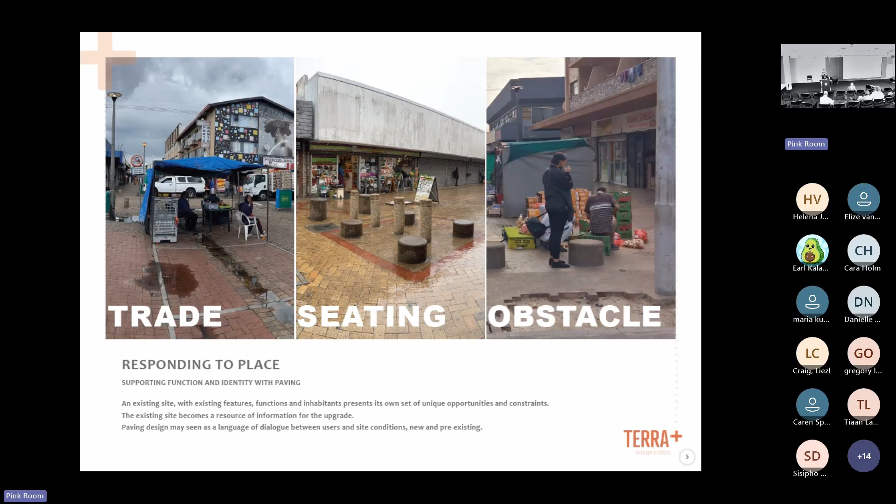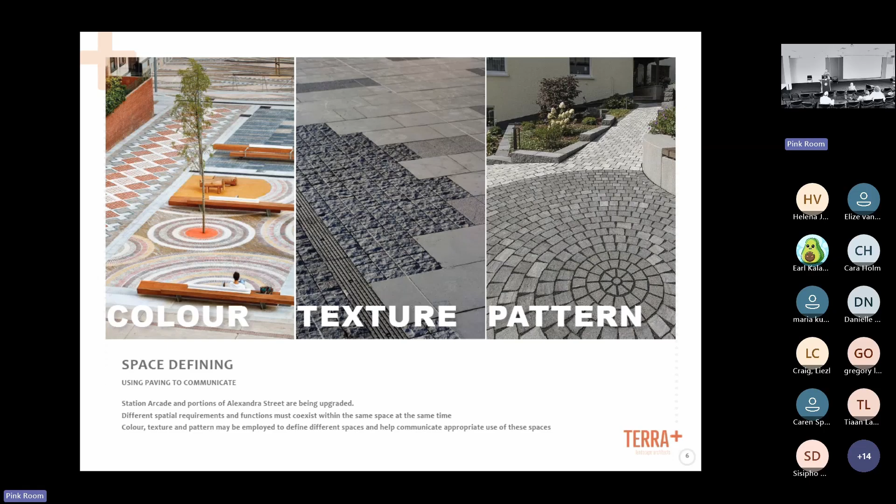We did this by defining the space and creating spaces that could become legible for pedestrians. It really is about creating those textures and colors and patterns to define certain public spaces.

There were significant intersections, and each had a specific way of dealing with the paving and with the seating. You can see some trees there - unfortunately those have fallen by the wayside because we couldn't get a water connection or irrigation to the trees. So that is one of the constraints that happens.

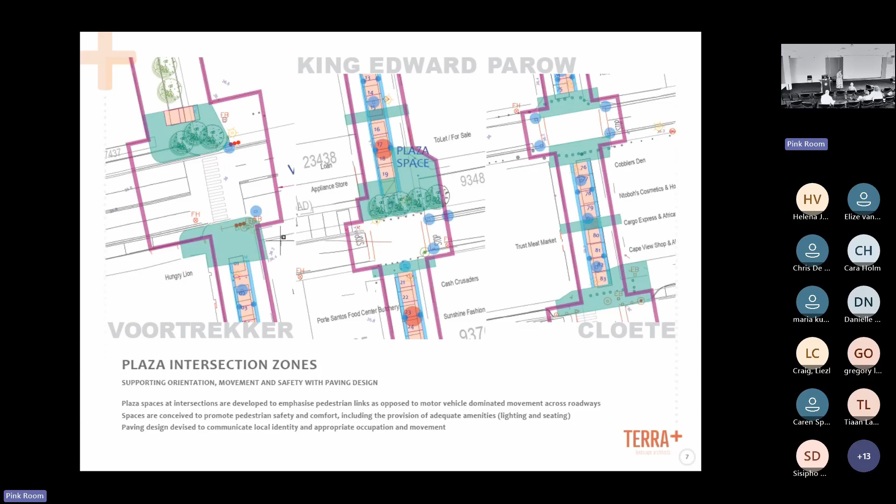You'll see that there are trader bays that we had to accommodate in the space, bollards that we had to accommodate, and paving that happens along, and lighting that needed to be accommodated. So the plan actually became quite diagrammatic, and the execution of it then had to start happening in the paving itself.

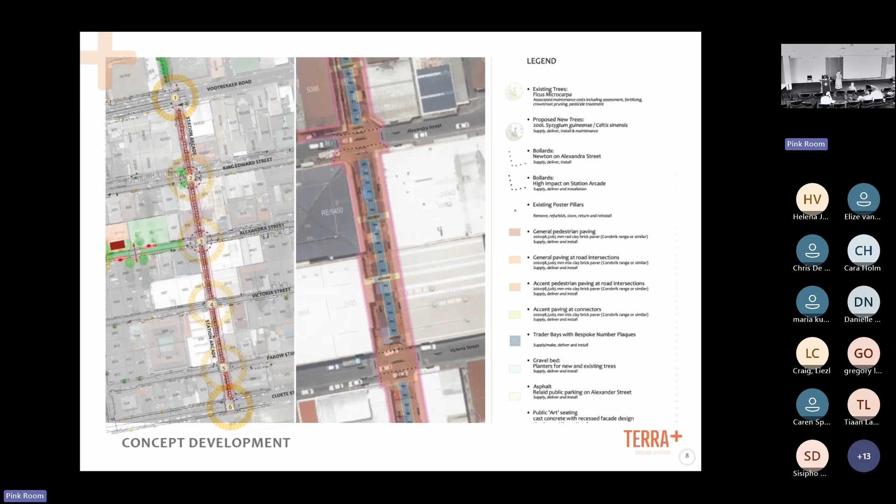This is just one of the plans, to show you what these type of plans start looking like - the concept development, and then the paving patterns we designed to create the identity of each of these spaces, which is quite exciting to do.

What is nice about this, and great about this, is that it shouldn't cost anything more to create something interesting, because a paver is a paver - it costs the same whether you lay it in one straight plain paving or whether you start creating patterns with it.

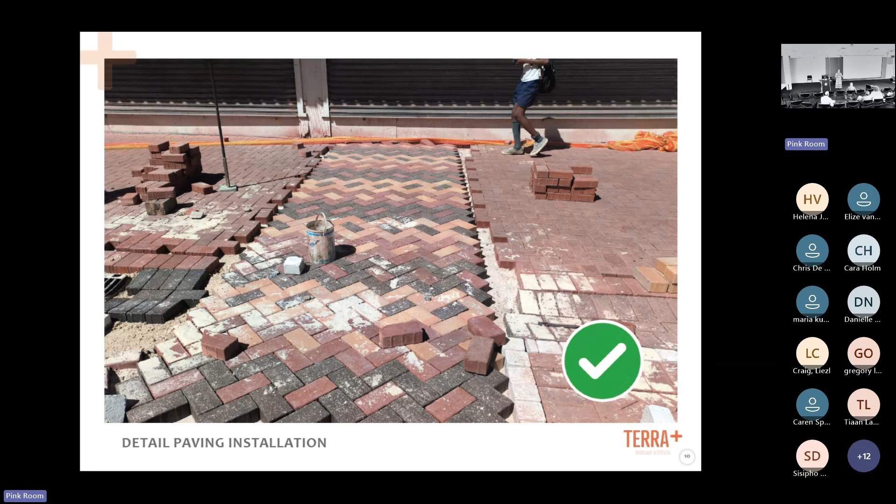There's some implementation, so hopefully by the end of this year we'll be able to go to Station Arcade and actually experience these patterns all along Station Arcade as you walk from the train station up to Voortrekker Road.

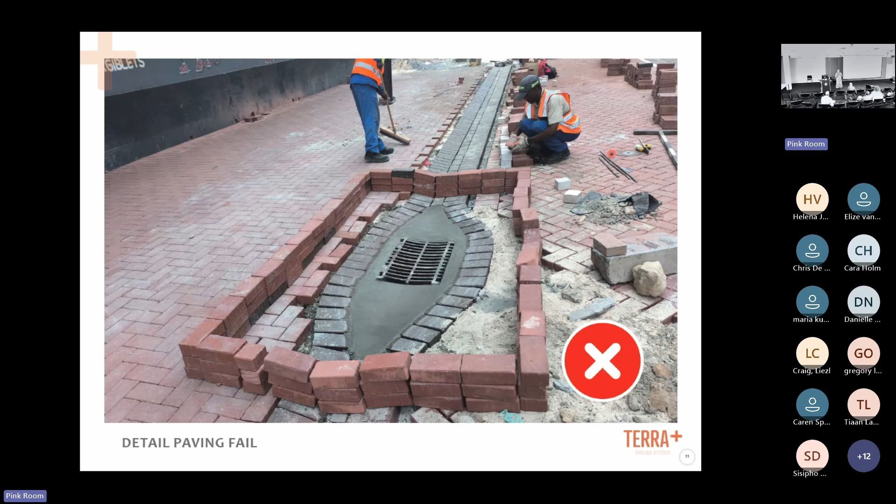And then there are mistakes, when the contractor takes their own initiative and decides they're going to do the paving themselves, and they pull you to site. They were supposed to put the stormwater grate in line with the stormwater channel. We deal with it though - that's part of being a landscape architect, to take a deep breath, go to site, and then calmly explain to them that that is just something that cannot happen.

The next project was a private project. The residence, it's here on the campus - it's housing for students. There used to be tennis courts there with a strong heritage aspect to it, which we often deal with in our office. We have a lot of projects that cross over into heritage issues you have to deal with, so how do you deal with that kind of urban heritage constraint?

There's another set of dialogues you have to enter into with a heritage consultant, where they start setting up certain indicators and guidelines they'd like to see represented in the landscape. You've got to be responsive to that and start looking at the landscape from a critical heritage aspect.

This was sited in - you all know where this is, I'm sure some of you might have friends that stay there. This was the early concept plan I did for it, where these blocks of housing were given - these houses were a response to that form, and that type of landscape had to be responsive to the streetscape as well, with certain elements and existing trees that had to be kept.

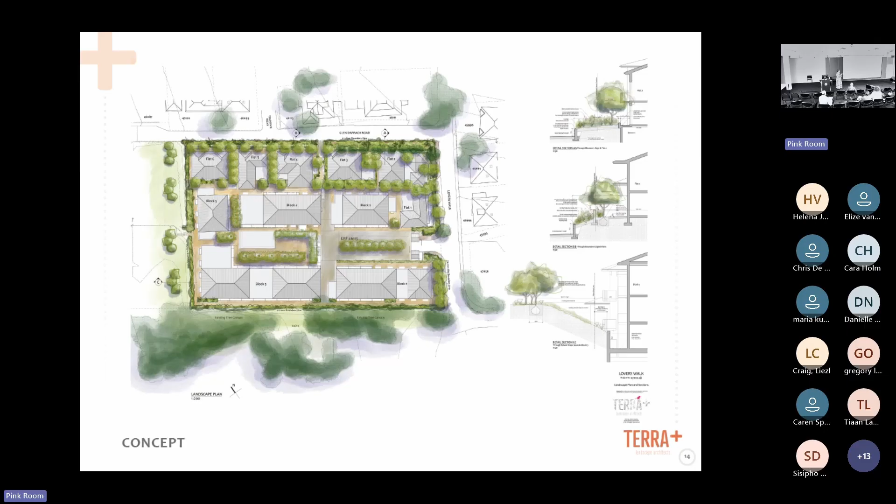And an existing wall that had to be kept, and a huge existing oak that had to be retained. The site was quite dramatic because it's very condensed and high density on a very small site, so it had to be excavated. This was the original pavilion, and that had to be excavated to allow for underground parking, because there's no surface parking on this development - it's all underground, which has its own constraints for planting trees on a roof deck.

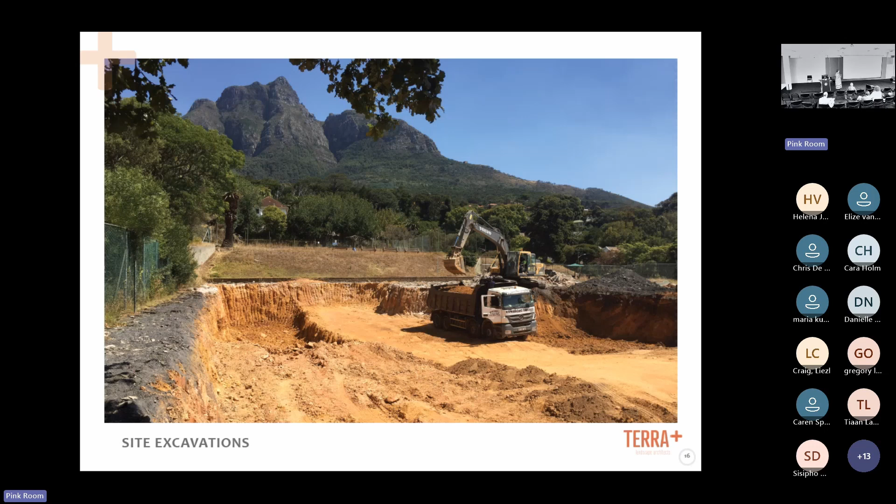So that was the plan, and that's it. Looks not very, but it's actually quite a beautiful little project - like a little piece of jade, I use it because it has such beautiful moments in it.

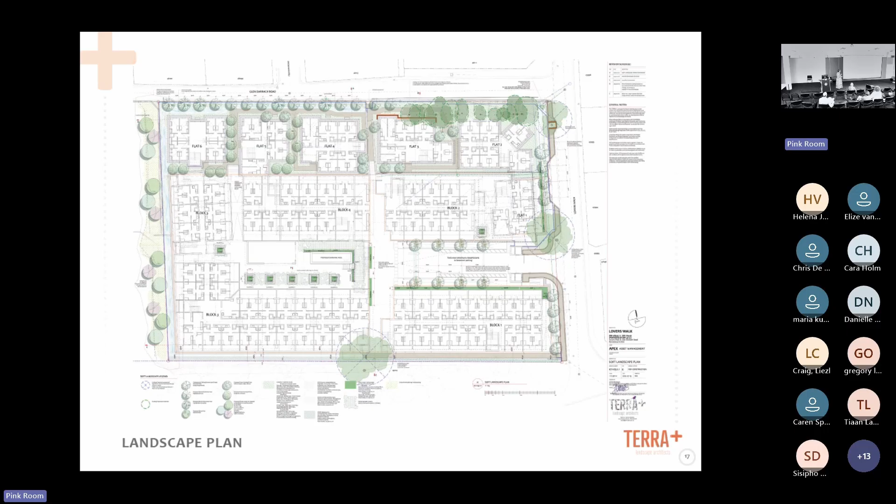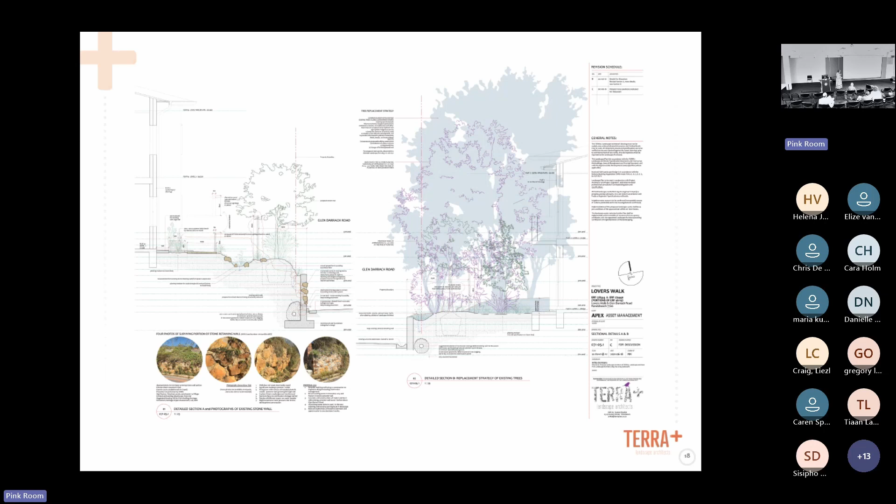That's another example of keeping the existing trees, and how do you manage that? How do you manage the soil level? How do you manage the existing walls, and then the new build that sits next to it? It was quite tight, as you can see in that space - that all had to happen in that space.

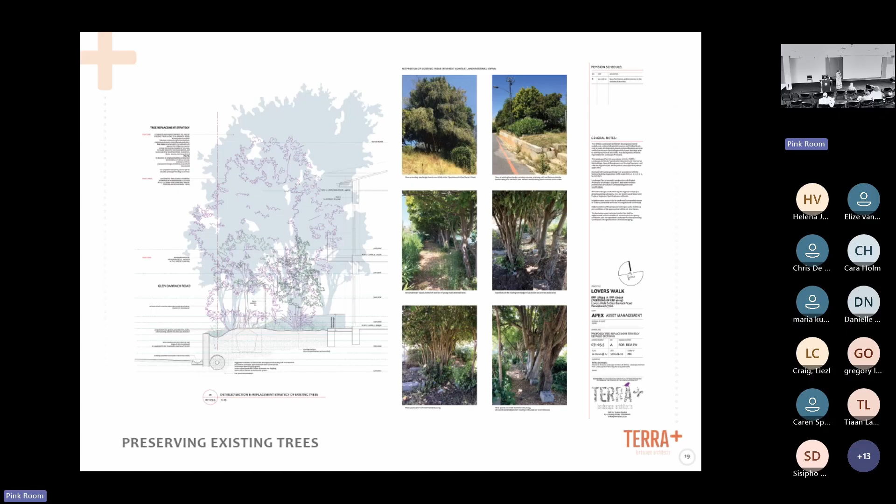And there again, the existing trees in the pathway. How do we manage that pathway within the confines of this?

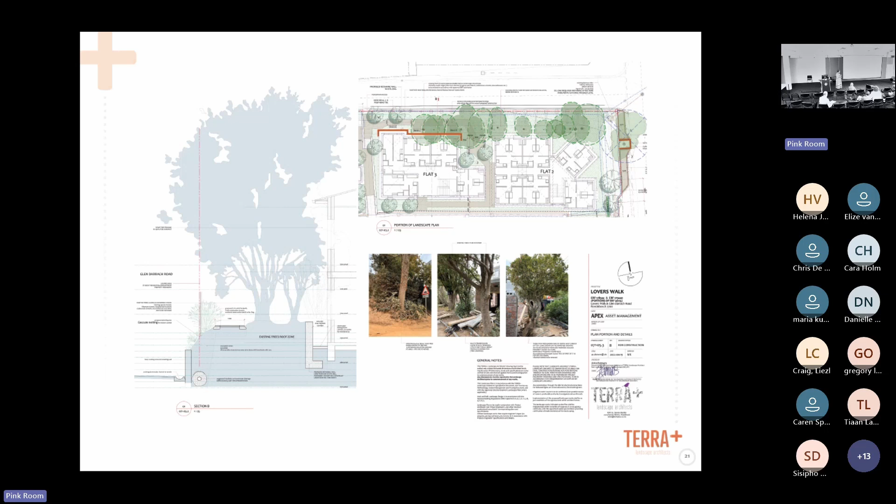So you start loving your engineers. There's another dialogue you have to enter into - with your civil engineer, and quite early with your structural engineer, because they are critical if you want certain things to happen. They're critical for you to create spaces you've imagined, and you've got to make friends with them, and ultimately with your contractor. You cannot be too horrible to them, because they are actually going to make things happen for you.

There's some images of what that wall looked like, and then what it was after that. That's what it's looking like now, and that's what it looked like before - it was redone completely to keep that heritage wall and that heritage aspect. There's a final picture of it.

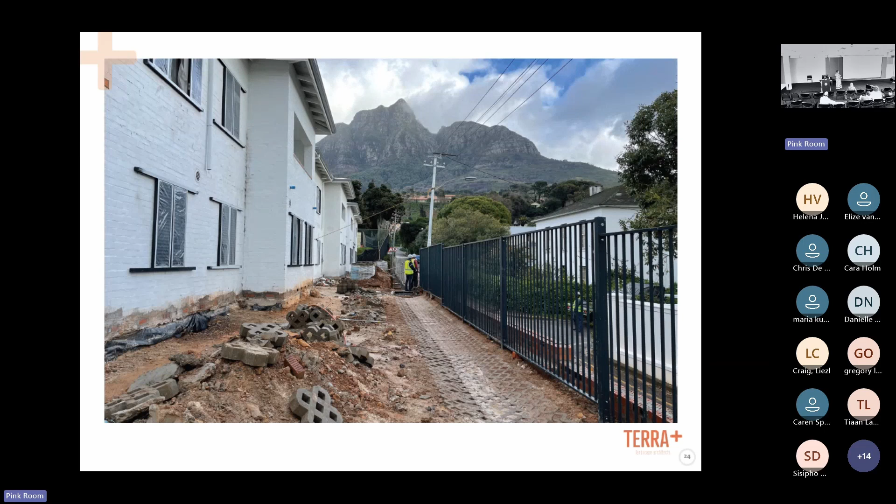There's the stormwater system that we daylighted along here, and with the engineers' help, we planted trees in there and added more planting. We kept the existing old oak tree. We hope it's not going to die from polyphagous shot hole borer, but it's there. It's not in great shape, but we kept it.

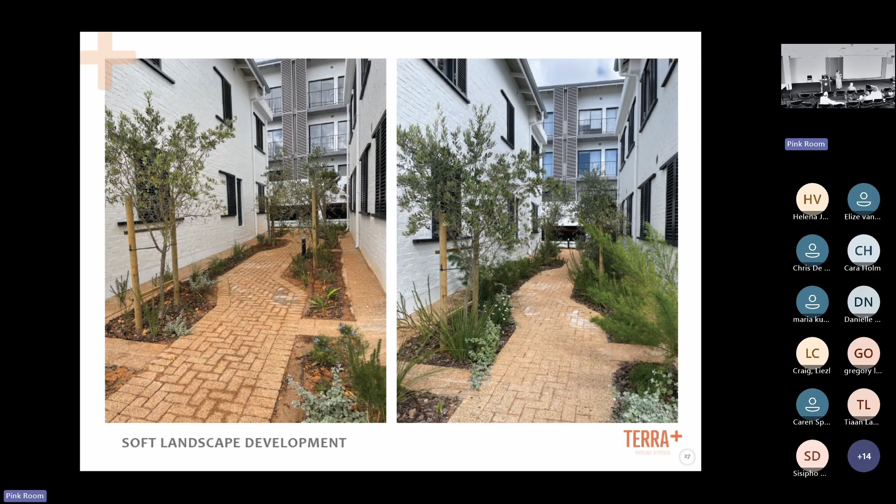These are before and after pictures of the planting. It was really a project of interstitial spaces, and what you can do with those spaces to make them quite beautiful, acknowledging that people don't walk in a straight line, they walk in a meander. So we brought that meandering quality between these buildings, with the existing and the planted.

There's some pictures of what it looks like now. Quite a rich planting palette, with lemon trees, which I'm told are being used regularly, and avo trees by the students. So many gin and tonics are being drunk, I think, in this residence. There's just an example of the plant mix.

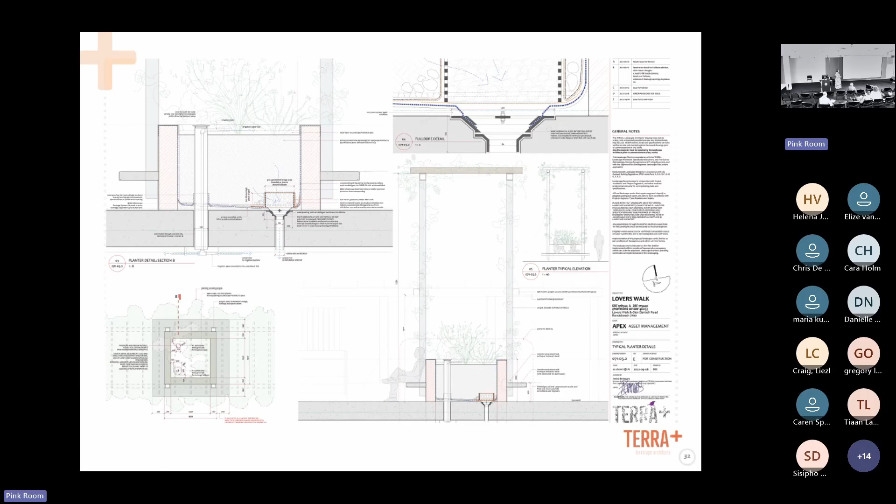And then how do you deal with the courtyard, and how do you plant on a courtyard, and how do you convince your structural engineer that you want this and that they must make it happen for you. So you start developing that. There's a dialogue with your structural engineer on how you're going to penetrate the slab, how you're going to bring the irrigation up, how you're going to have inspection holes for the full bore, all of that, just to make this happen.

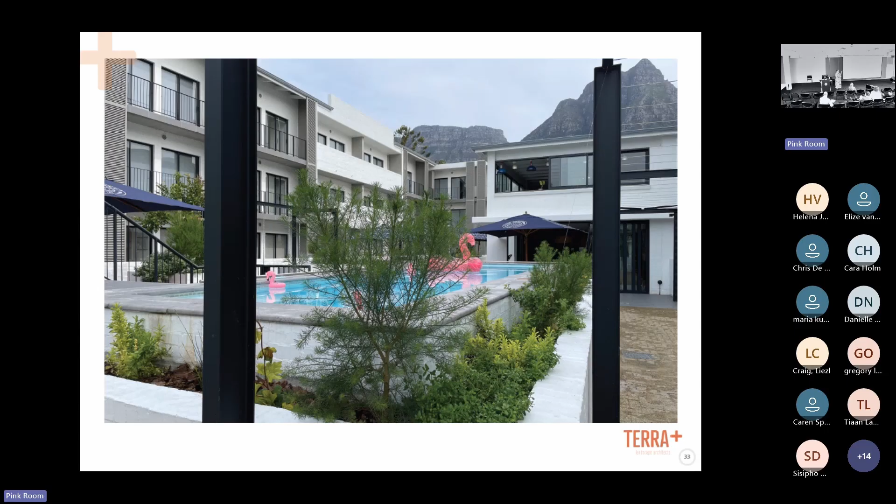So this is a good example of a project which was privately funded, limited budget, but still allowed us to take all the constraints we had and make something quite special. Because of this project, their leasing or rental is almost 100%, because all the parents that come in here look at it and go, yeah, that's a great space for our children to be.

This is another private project that we did called Parc du Cap, and the reason I chose this is because there was a dialogue of an old landscape with a new landscape. We were called in to do a framework plan for the whole Parc du Cap - I don't know if you know where it is. You probably won't ever see what it looks like inside, these horrible buildings. On the outside, these real 80s monoliths. And yet when you go inside, it's populated by people, and people access the spaces in between these buildings.

They asked us to look at the framework plan for it and to reimagine their gardens, which were planted at that time as quite a monoculture of agapanthus and dietes. And we went further at this stage - we weren't only going to look at that, but also at how people move through that space.

So how can we make it so that at lunchtime, when people move from one building to the cafeteria at the bottom and have to navigate all the streets, roads, and cars, they actually feel more comfortable and the cars feel slightly less comfortable? We did that by introducing a paving band that actually recognizes the pedestrian and how people cross there.

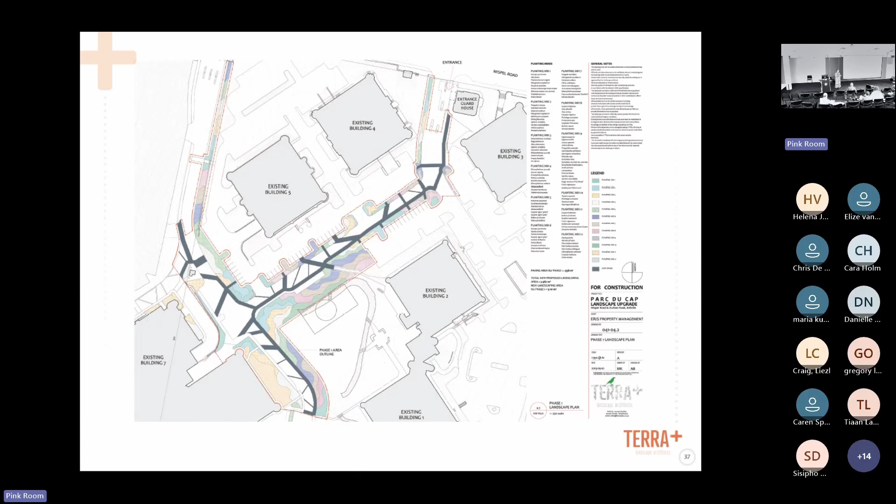And then obviously we also introduced planting, creating a planting palette that's a little closer to the environment of the context. The planting arrangement is not as strictly geometric as it used to be - it's a little more mixed, so you get a kind of wilder garden feel.

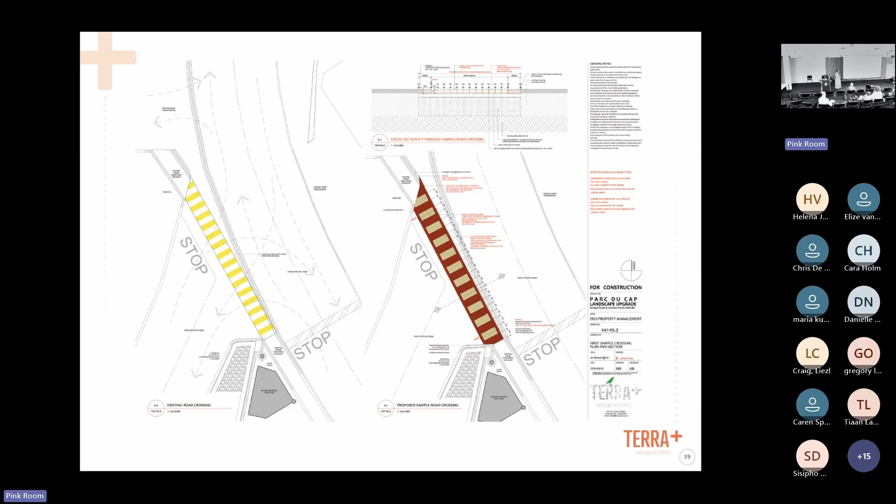That was the planting palette we presented to them, which they liked, all the colors. They wanted red, blue, and white because of the metropolitan colors. The insurance company had these, and we presented them, they were quite happy with this. These were the existing painted pedestrian crossings, and we just introduced a paving band that goes across them. So there you can see there's still a remnant of the existing.

We're not going to take it out, it must just fade away. This is the introduction of the new diagonal across the street, and it has slowed traffic down significantly.

So there you can see a little detail of it. I'm bringing in the technical drawings so that you can see there is a reason to do them, because you can convey and speak quite a lot of information through a technical drawing, and they don't have to be dull, they can actually be beautiful.

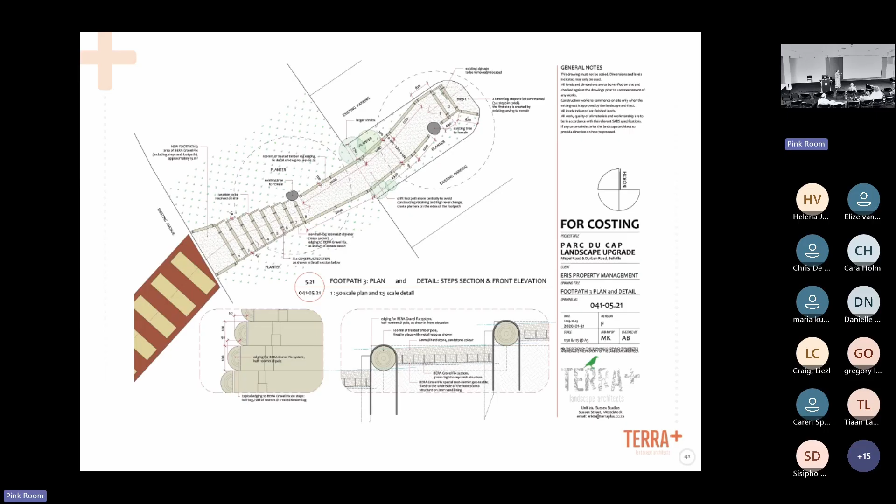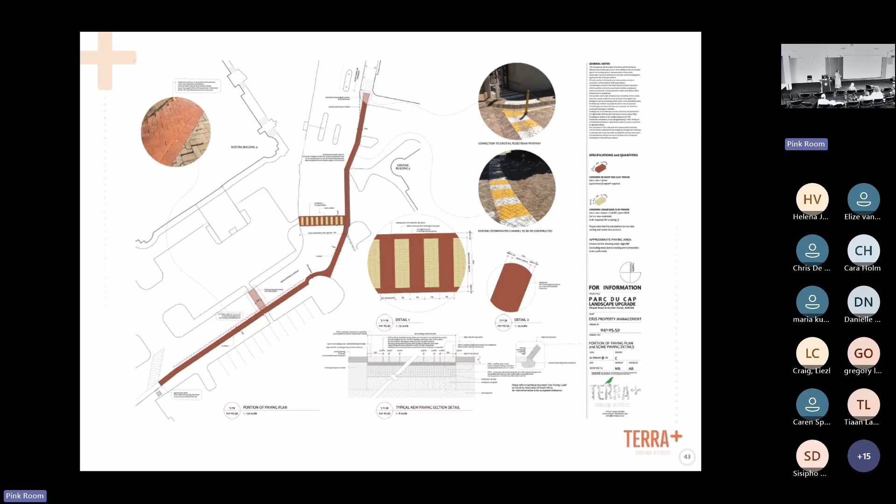There's an example of where it is installed. So we just narrowed the whole roadway and gave the pedestrians the space to walk within the street.

There's another example of a very simple detail, but if you don't draw it right, they're not going to build it.

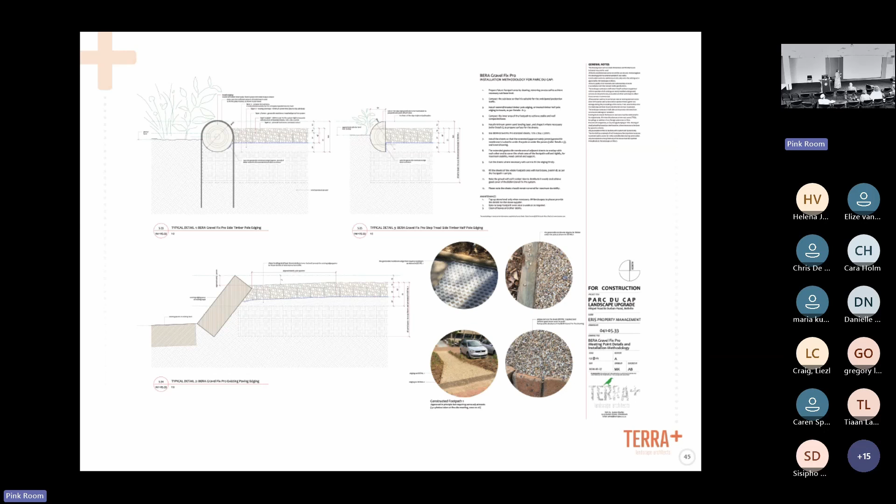The reason I chose this is because I had a dialogue with the previous landscape architect, Tana, who did the drawings and took the project up into stage 3, in stage 2 and halfway through stage 3, and we then took over from that.

Now, normally it sometimes doesn't work, because not all landscape architects would necessarily want to enter into a dialogue or want to talk to each other.

But in this case, Tana and I have a great synergy in our thinking. I respect Tana hugely. She was my mentor when I did my master's, so I think she'll forever be my mentor. We took those drawings and added to them and reinterpreted them, keeping some elements, tweaking some a bit, and changing others.

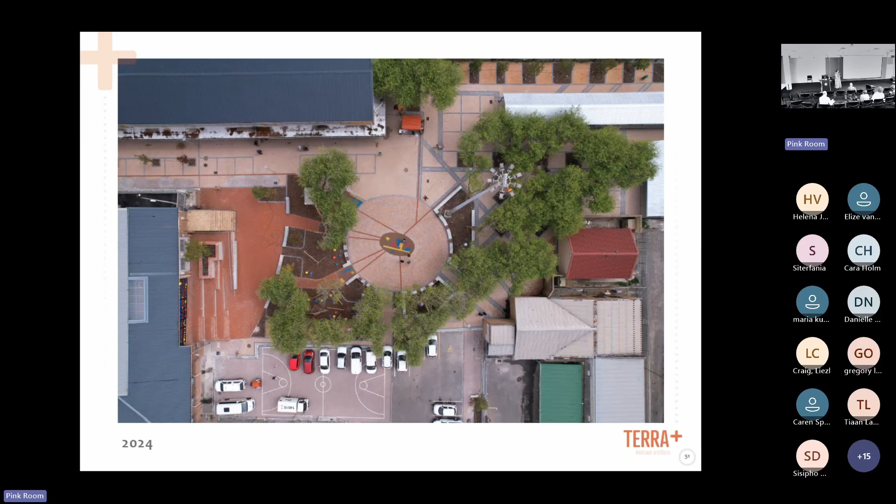What was also introduced here, which was another element of dialogue, is the discussion we had with Lorenzo Nassimbeni, who's an artist. There was an artistic component to it, and he ran a whole workshop with the children of Waterhevel, preparing a number of slides and drawings that became early concept drawings, which were then realized in a number of artworks around the square.

So I'm just showing these concept drawings because you have to show the city something. It was about using that color and how that color can be brought into the square with artwork, whether in the paving or on the wall.

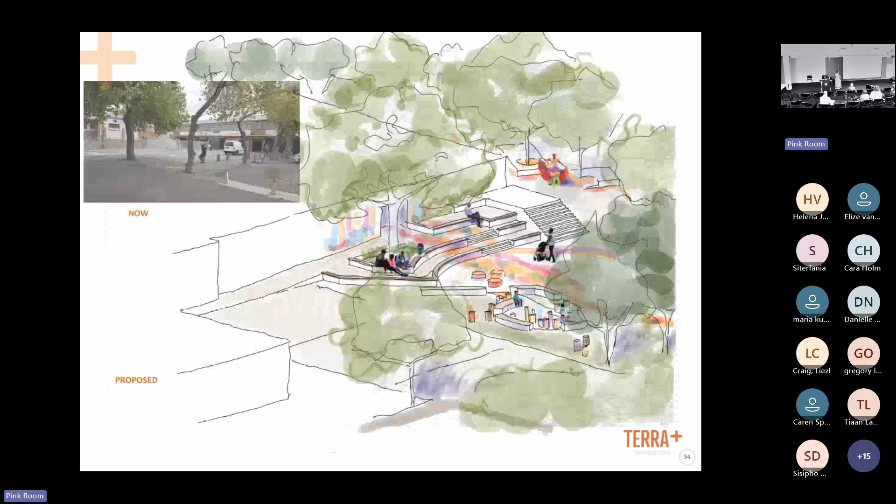It's just imagined drawings, and then that was the last final plan. Again, it's a technical drawing, just to show you that they can be quite evocative and beautiful.

There's some images of the artwork that Lorenzo did and how we repeated that in very simple, robust play equipment. It doesn't have to be the most expensive play equipment or made out of the most expensive material, but it's robust and it's being used.

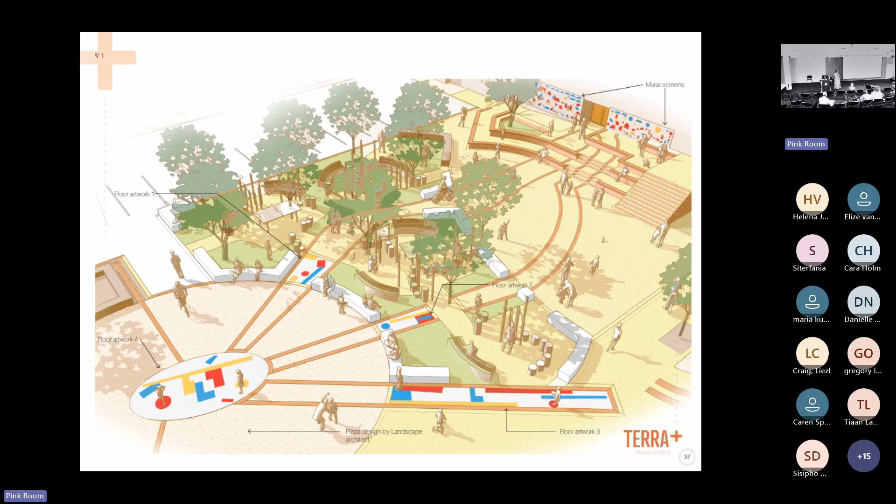Then Lorenzo did a 3D of the artwork components. So there was an artwork component in the floor of the big circular or ellipse gathering space, and artwork along these routes that take you to the library.

Images of the artwork of the library right at the back, and that was the artwork proposal for the security screen.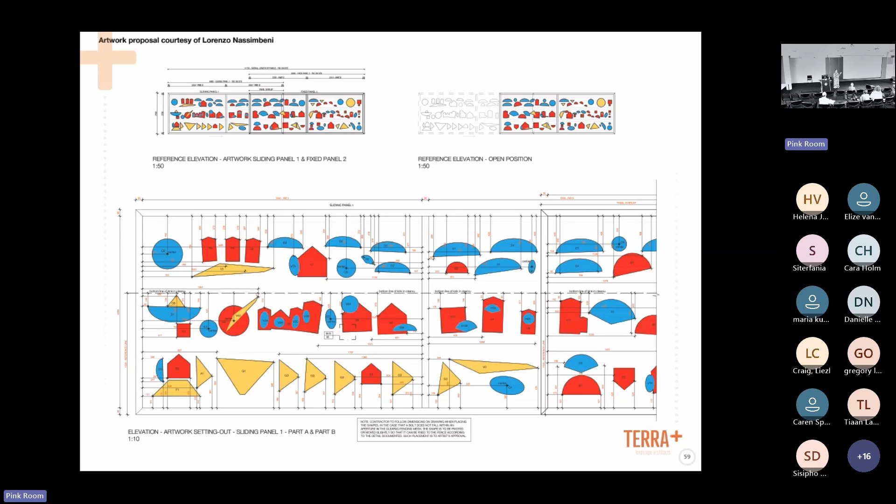It's a security screen that functions as a utilitarian object, but these elements were introduced to make it playful and create a piece of art based on the drawings, framed in the library, that all the kids did. It was a lovely process that he took on. There's an example of it.

Muizenberg beachfront upgrade. Now, when you run a practice like mine, we're like a family of people in a sense, and they each have their own project.

This project is run by Penny. You all know Penny, she's giving you plants and design. She runs it in my office, and there's constant dialogue between me and her about what happens there. I don't necessarily have to go to the project every single time, but there has to be a sense of involvement. Penny has been running this project.

It started with our scope to look at this beachfront. There were certain constraints: the parking had to stay here, and the engineers designed the seawall to manage the erosion of the sand. There was quite a big dialogue about what the engineer elements are, what the paving elements are, who does what — coastal engineers designed the steps.

We had input on the materiality and the surface finish. There's a whole conversation you have to have. At some point you have to let go of a certain amount of your ego and accept that there are certain constraints you can't change and certain things you can, or you start deciding what you want to fight for. Then you go into a more robust dialogue with your other consultants.

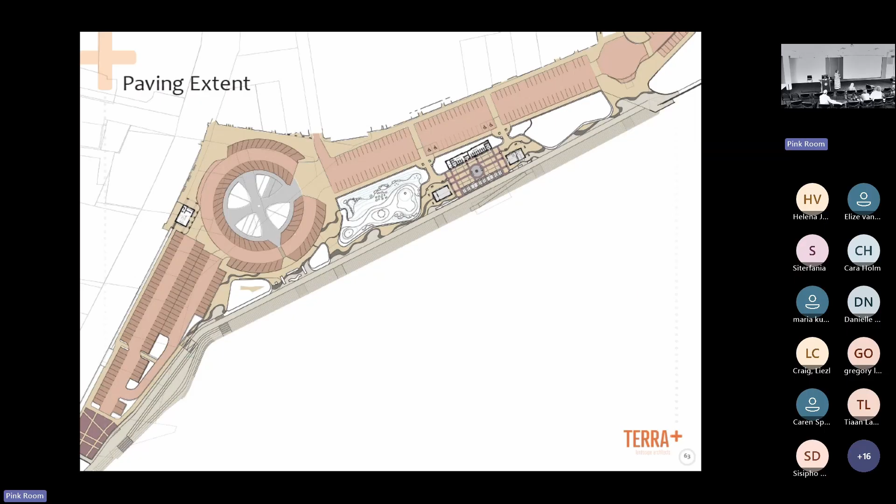This was the paving extent. Certain elements again were heritage elements that had to be kept, and certain elements we had a little bit more free rein with.

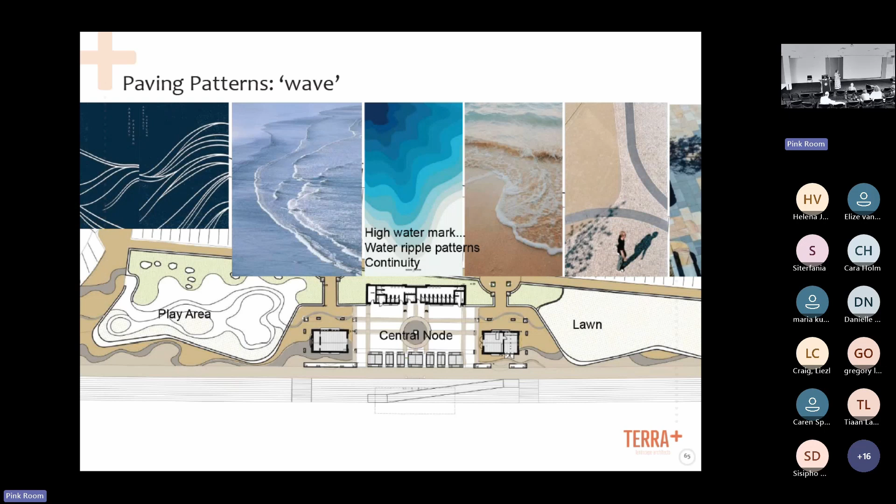The concept really was, obviously being next to the coast, looking at waves and paving and wave patterns and what you can do with that. Again, we express that in the paving.

So we had an octopus, and we've got sea kelp — that's another way of getting a playful element in. I don't think one should go out and buy bespoke play equipment that is made in a special way; I think we can use basic elements.

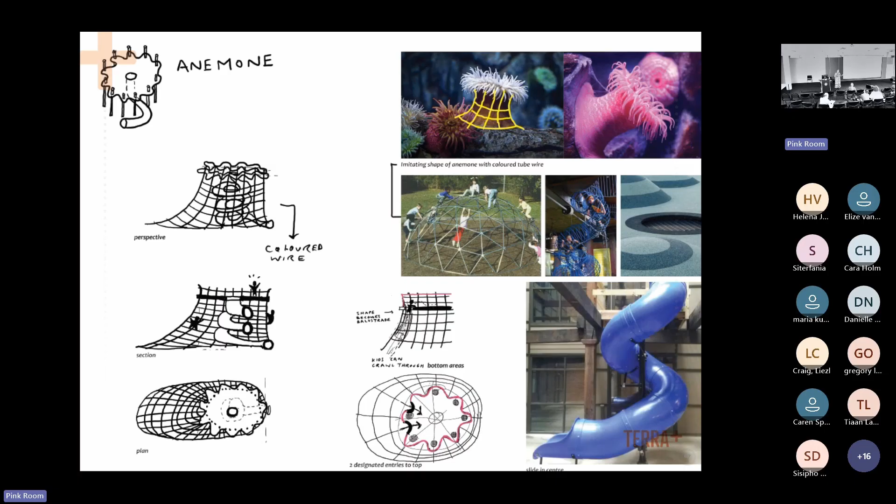We used the elements that you would normally get in play equipment that is easy to access, easy to work with, easy for a contractor to do, because these projects, when they go out to tender, go to a contractor who's not a play equipment contractor — they are basic contractors who need to be able to do all of this.

That was the central node. You'll probably start seeing a lot of this happening. The beach, the sea wall is being implemented, and all of this will be done fairly soon.

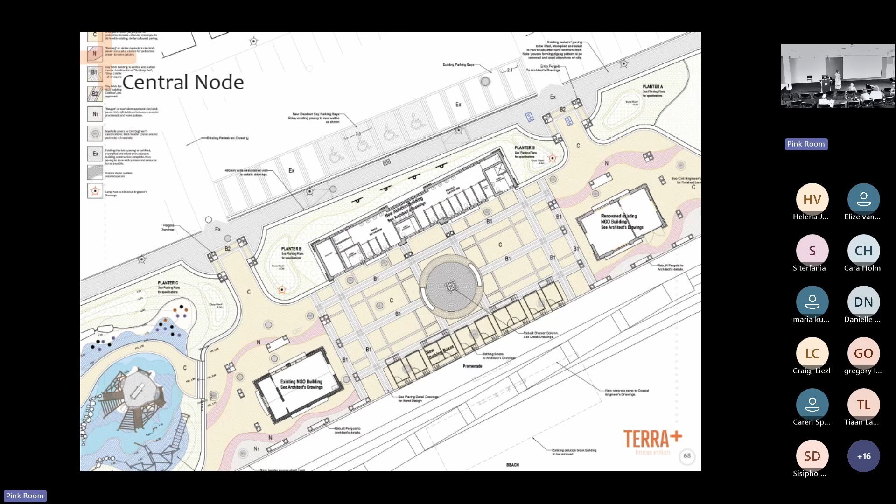Paving patterns again — here's just another way of using paving patterns that are playful. These do get drawn out in a DWG so that they can be set out on site, because I'm not going to trust anybody to do this. I have to put it on a drawing. If I don't put it on a drawing, they're not going to do it like this.

There's a bit of understanding that you need to be very clear in that dialogue with the contractor. You need to be very clear about what it is that you want. Otherwise they do what they do in Para, and they carry on thinking it's fantastic.

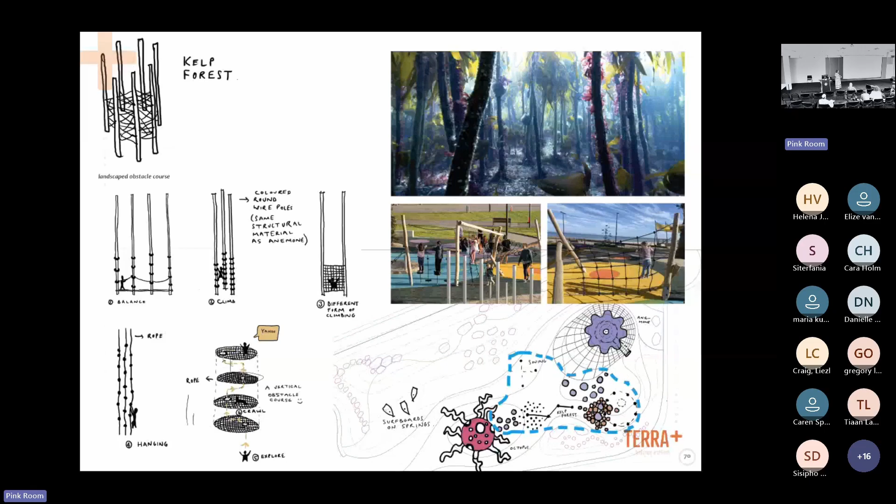This is also just a little playful element of the kelp forest, reimagining what it can be. And that's the play area — that translates into something that needs to be built, and how do you make it legible for it to be built?

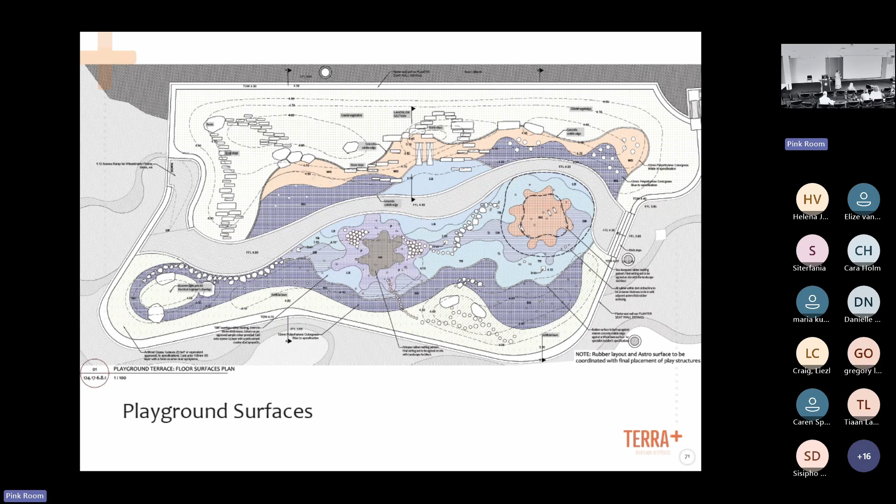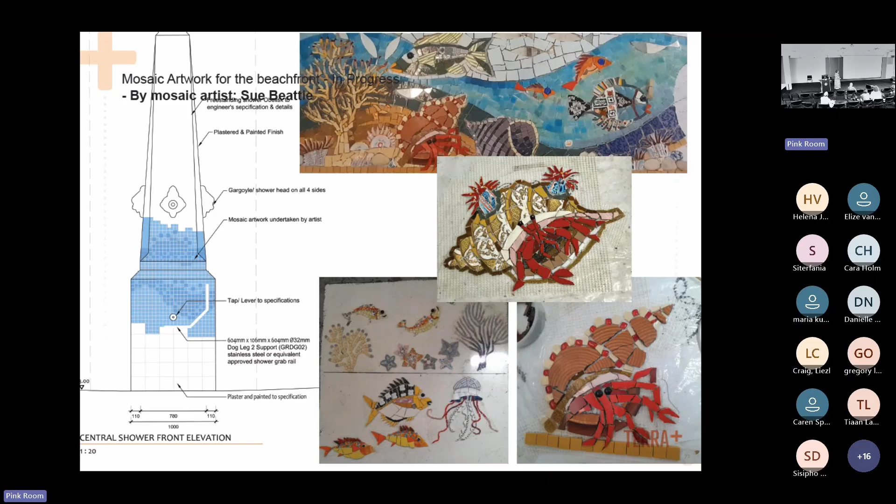Westridge Park, I don't know if this is going to be built. This is part of the early education, Department of Early Education. They also did EEG, which we were also involved in. There was an area in Westridge where they wanted to introduce a new building, and they had this mound that had a walkway on it, but they wanted to reimagine what you could do and have it as an educational walkway. So we got involved in that.

And of course, you get involved in the parking and how the parking there should be, and the paving of this walk, and you start integrating it, because you never work in isolation. It started with a little building, but we always kind of stretch it a little bit further of where one can be, because you need to do that. You need to push those edges to understand, to make the client understand that it is part of a broader context and not just in isolation.

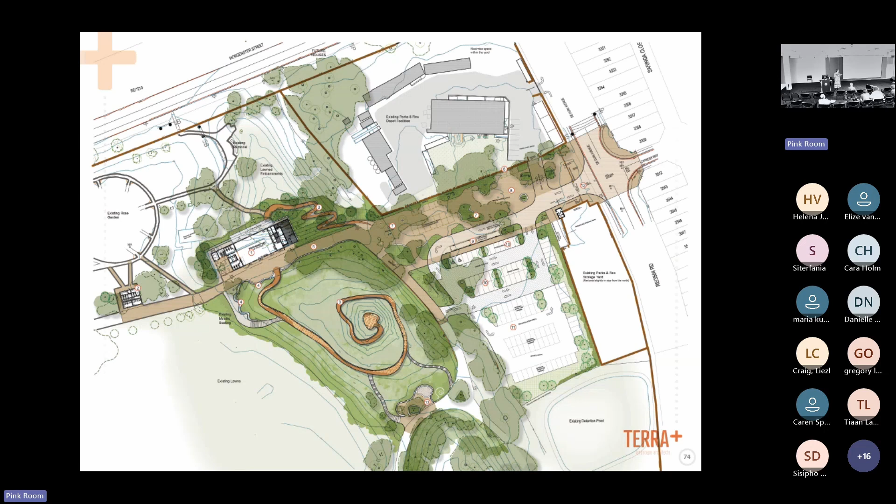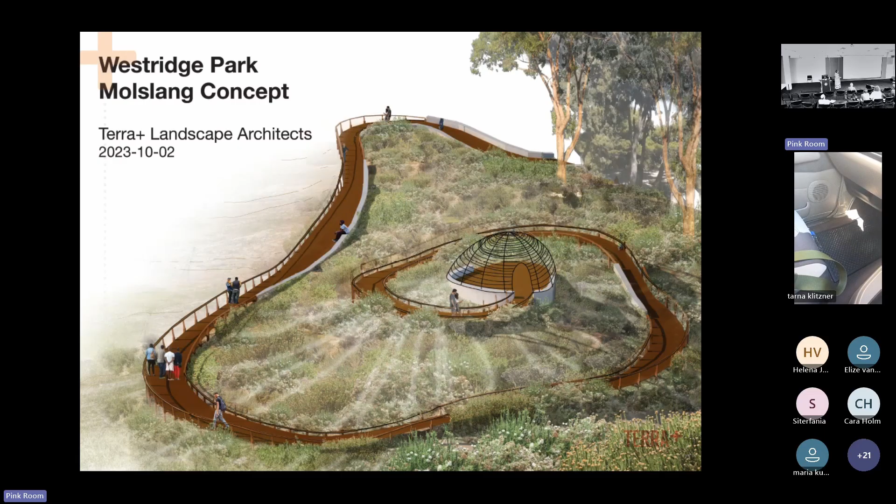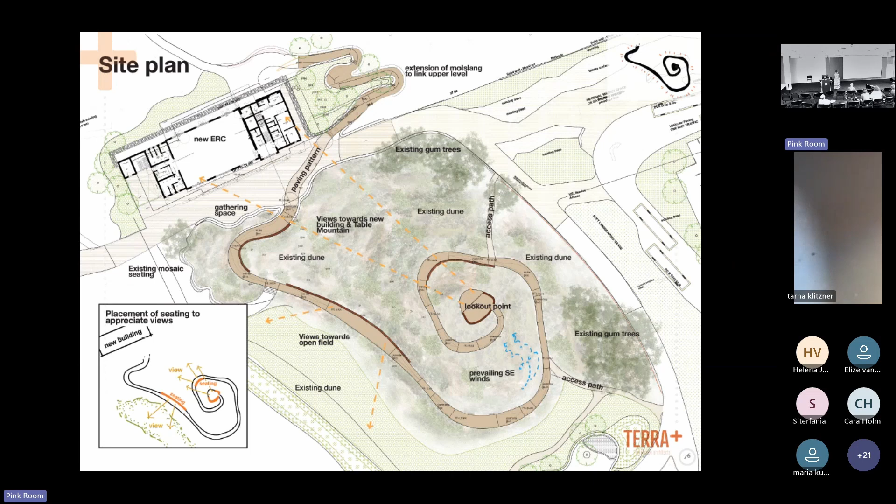So this is just a little preview that we did of that walkway as it comes across into the dune, and where it ends was a request from the client at some point. Again, where do you place seating? What do they look like? What are the views? Where's the wind direction from? And how would this thing function within the landscape? Ending at the building.

There's the early concepts of the lookout point. And then you've got to figure it out, right? It's got to sit in the landscape. You've got to figure out what each of these support structures are going to do and what they look like and how they're going to be angled, because they have to have this undulating feel to it.

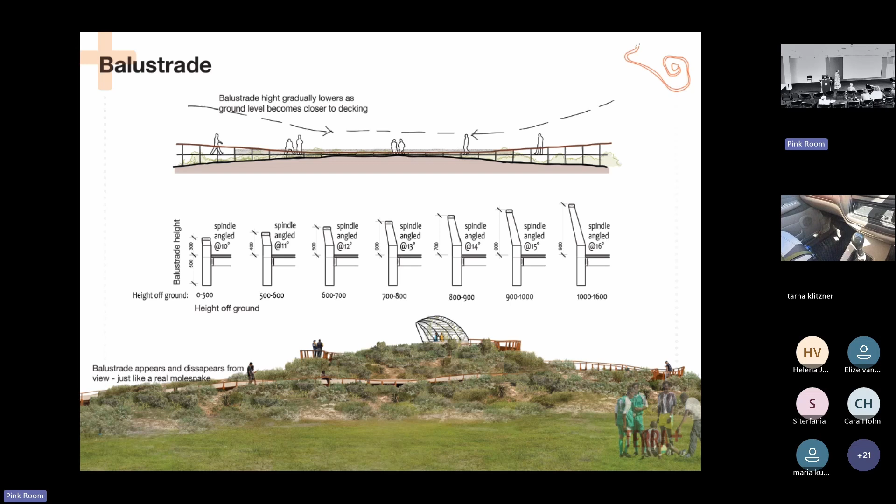So that's what we have to work out. We have to work out each of these so that this has an undulated feel, but it sits a certain distance off the ground. And I think that's the end of it.

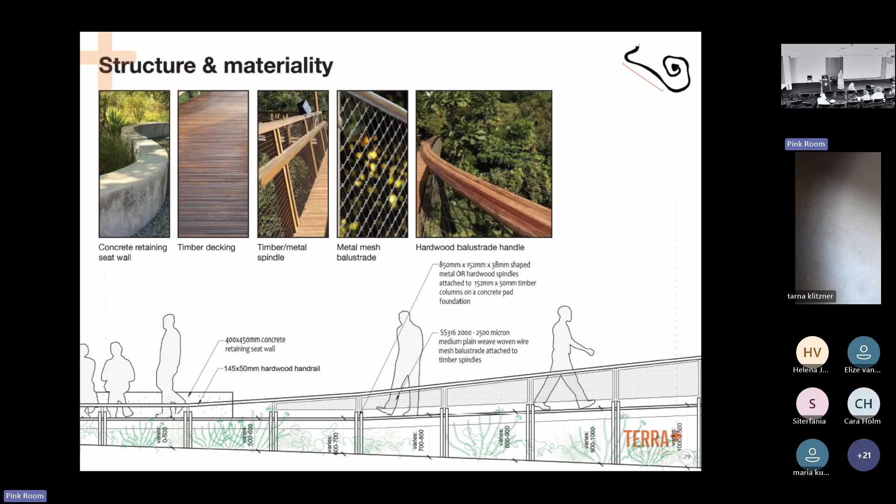And I know you spoke about this previous project where you researched the product. So when they give you those restrictions, do you stick to them, or do you research and design alternatives that can take them?

And then my second question is, as a principal, obviously we have a team of people, and I'm sure everyone's helping - like you mentioned the other project was being run by someone. So how do you ensure a level of keeping the same standard, I guess, because I know everyone has different ways of finding form and coming up with the design - if you come together and then do some stuff and then work individually, like that's super random?

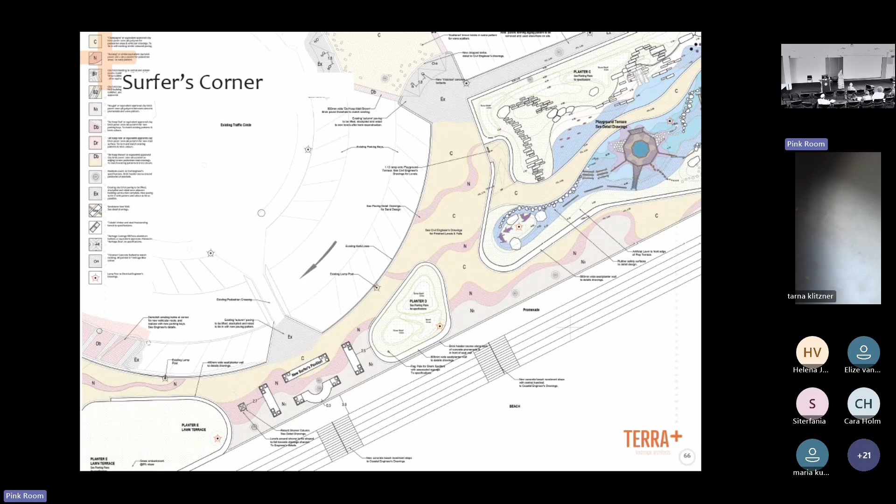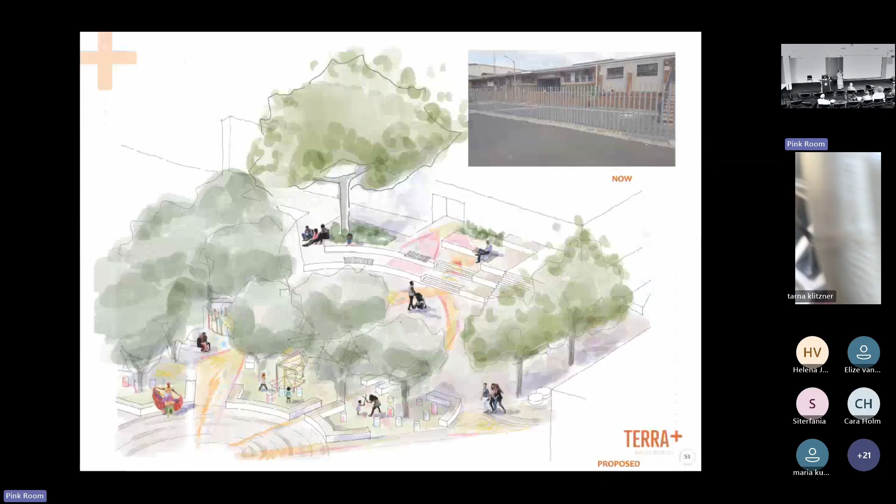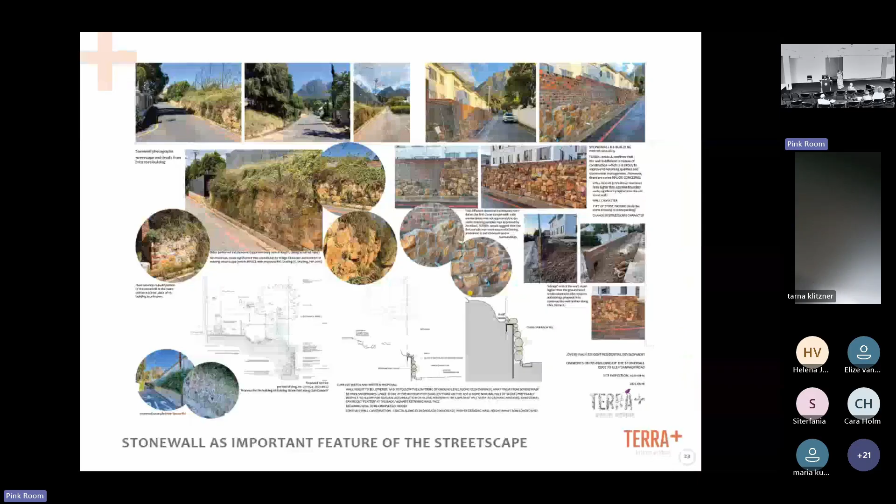So I cannot run Terra Plus on my own. There are people that run practices on their own, but I cannot do all of this work by myself - it's just not possible. What I can do is facilitate discussion and facilitate dialogue in the office, but I hold everybody to a certain standard, because the only way I get more work is by producing good work.

If you go to my website, I don't have an office mission or a vision. I haven't gone for business coaching or anything like that. I just expect everybody to produce good work and to be passionate about what it is that they do. And then in the office we talk about it - we throw things around. I suppose the office's biggest resource is that dialogue.

So when I sit in the office, even though I've got VIAs and other things to do, I never really get anything done because there's constant dialogue in the office - constant talking. What do you think about this? What shall we do about this? They did this - Ankia, what about... So even with Muizenberg, although I didn't do the final drawings or some of the final designs, I had input into them.

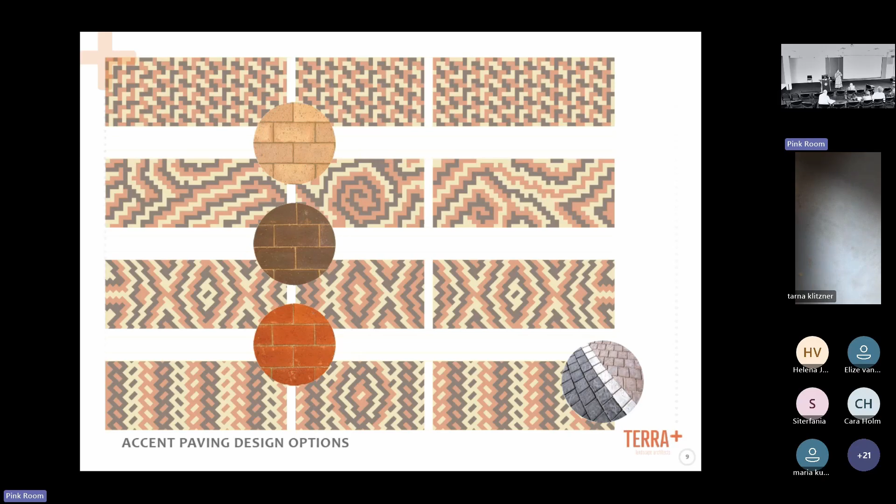Right, so it is kind of making yourself available - not holding the reins too much, letting go of some of the reins and allowing people to run with what they want to run with. And then at some point stepping in and saying, okay, I think maybe do it like this, or think about this, or what shall we do about this. It's that constant in between being in control and not being in control.

I don't know, you must ask them whether they'd be happy that I'm away, but I don't know - they can maybe tell you, yes, now let them go. I don't know. But that's just how we function in the office - it's not really a hierarchical office where I do all the designs and give it to them to interpret.

No. Because they're all fully fledged landscape architects, right? They all have a master's. For God's sake, who am I to tell them how to skin a cat?

And in any case, in any design, if I give this design to anyone, there are millions of ways to get to a solution. There's not just one perfect solution. We don't have to have projects that are like, wow, oh my God, there's this thing. I don't want my project to be this project that everybody has to go and see.

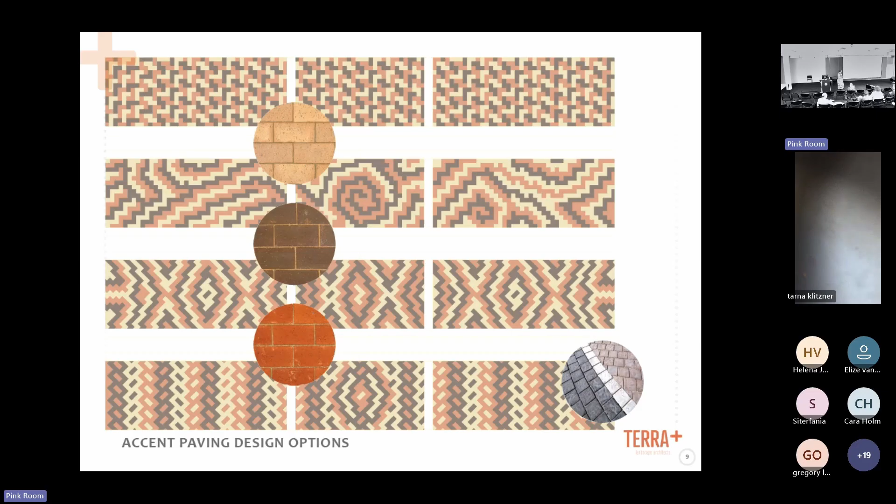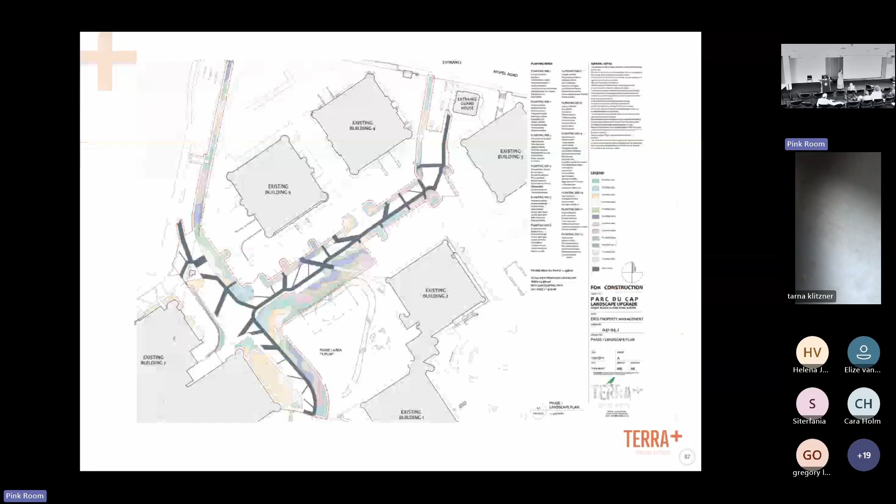The beachfront, I know they did a redesign of it, and there were public comments on that. Yes, so there's that dialogue as well, with design reports. Yes, so obviously with public engagement, you get to beachfront.

Sorry, I'm flipping through all of these, but there—yes, there was public engagement. Paarl had public engagement, Bristol had public engagement. Westridge, I don't know if we went to public engagement. Muizenberg had public engagement. And with all of them, we have to take the public comments into account and tweak the design where necessary.

So there is another dialogue you have to enter into, and take cognizance of it, because it's not a private project—it's a project that has to serve the people. I don't know how many public processes we had, I think two. It depends on the statutory process that it runs, how many public processes follow. If there's an EIA, I think it has two. If it's just a city public engagement, not statutory, then it's just an open house and show the work.

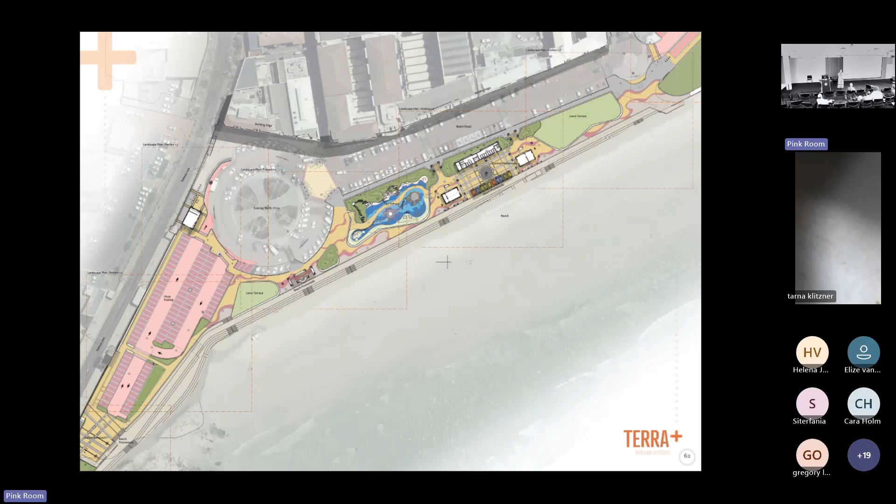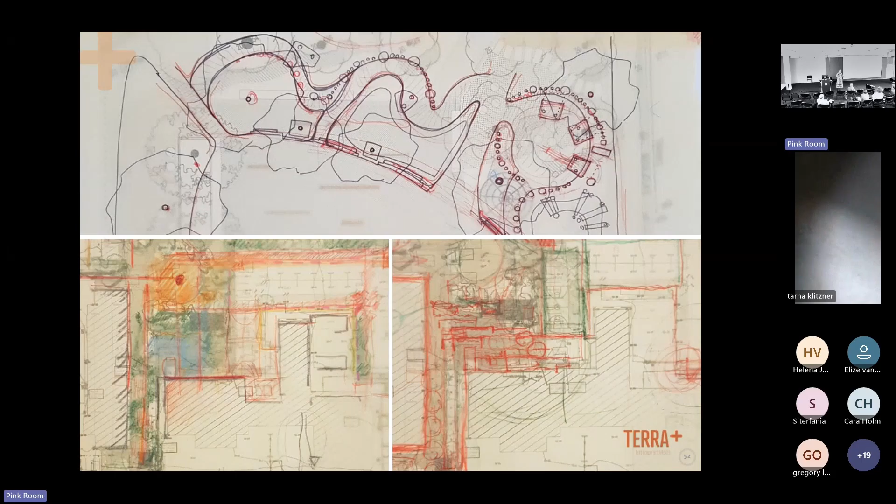In the office, you have to use your details—flex all the work you've done and really use it. Using Muizenberg beachfront paving, that idea can be applied elsewhere. We did a project, Harbour Arch, the floor had a pattern similar to this, and we simply used some of that material and adapted it. You don't have to reinvent the wheel every single time. At UCT level, you have a new project every time, but you've got to build up your own library. If you work in Europe, you've got a library you can buy. Here, we don't have that because of certain constraints, but that makes you think differently and makes you flexible in your thinking, not having a library you can just pull from.

You've got to build up your own library and details. So if I were you, I would start building up that library now—typical details. Are you using Revit or something else?

Revit's not designed for landscape architects. I run my office on Mac, so Revit doesn't fit that platform. We use AutoCAD, SketchUp, hand drawings, and I use the iPad a lot.

We go cross-media a lot, so I would sometimes draw things by hand, and then Michael takes it and does beautiful Photoshop sections of it and reworks it. There's a wealth of information—if you want, you can go onto our website and look at some of the other work that we've done. Or you can say to me, Ankia, I'm really interested in this project, can I come and sit and I'll show you some of the work that goes with it. I can't show you everything though.

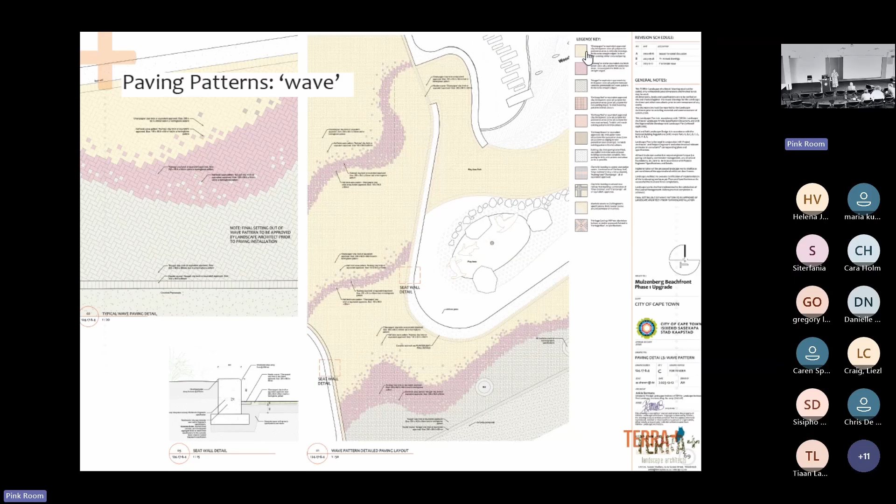Goodbye. Where did Maria put her name up? It was just for a second, just to ask you, who's your favorite in the office? Ola, Ola is my favorite.